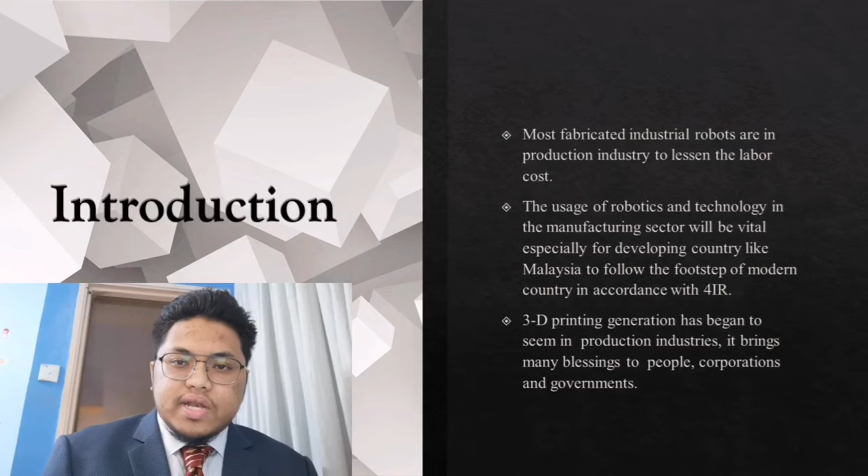For the summary of literature review, robots can handle things in ways that humans cannot, which involve hazardous, unsafe and repetitive tasks. There are many ways to fully utilize robots in industrial sectors such as material management, fabrication, welding and other repetitive tasks like stacking and discharging utilities.

The mechanical layout of the robotic arm is primarily based on a robotic manipulator with comparable features to a human arm. There are numerous potential directions for future studies where robot machining may be utilized in real world industries. The robotic arm can cover its own orbit as its operating space in the mechanical section.

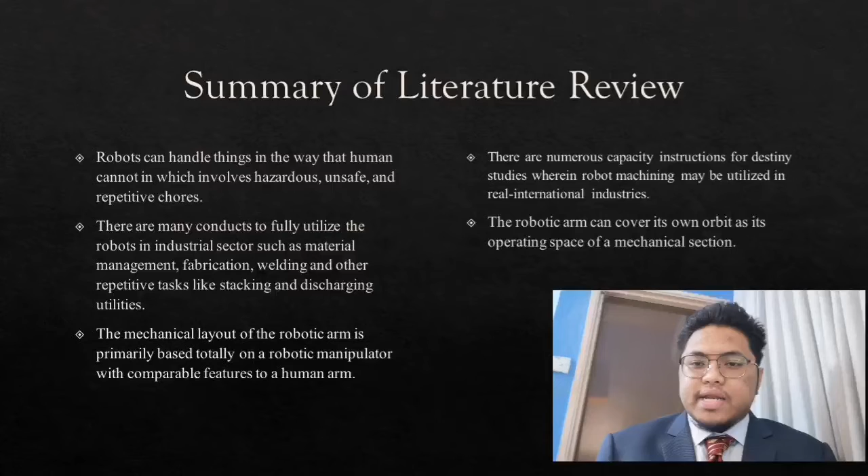Problem statement and objective: this project intends to break down the difficulties of the 3D robotic arm, constraint effects and outline mechanism. The striving and tricky aim was to locate a technique for development of mechanical structure design to attain the essential fundamental parameters. The prototype that exists in the lab has several shortcomings that must be overcome, which involve its design.

First and foremost, the shoulder of the robotic arm is too heavy and humongous, causing the overall motion to be halted. Due to its size, it cannot support the elbow to move smoothly, hence undermining its main objective, which is that its movement has to be effortless without any difficulties.

Servo motors are usually used in this project as actuators that pivot and rotate, also having thrust machinery sections with accuracy. Servos are primarily used for linear and angular motion with specific speed or acceleration. Back in the prototype, it mainly used servos as its actuators.

On the other hand, stepper motors are a better option compared to servos as they provide better power, attain a smooth and accurate flow, and at the same time sustain low product expenses. Multiple servos have been attached in the prototype, generating extra load and burden on the shoulder and elbow parts.

Also, 3D printing may be presented in parametric directives of freeform arcs. As a result, the essentially anisotropic properties of the 3D printed element may be controlled in such a way that it could be made tougher and more complex in either direction and particularly in regions with the right exploitation of the slicing software.

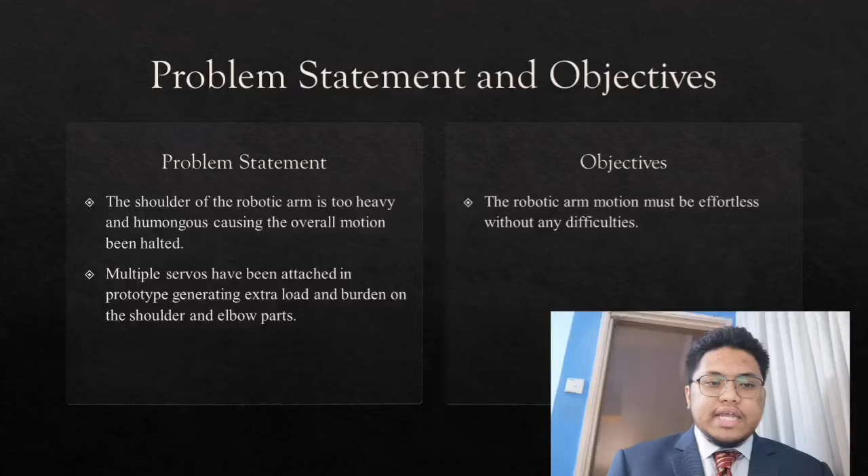It is not always the finest approach to enhance functionality and resolve manageability or other difficulties by combining more degrees of freedom through adding actuators, particularly during the initial layout phases at the start of the engineering project.

For the scope and limitations of the project, there are several limitations that halt the progress of this project because of several aspects of reasons, be it engineering-related problems or not. First and foremost, in order to be applied in the industrial sector, the robotic arm should be larger.

As we all know, to make a huge robotic arm comparable to existing metal robotic arms in industry, the 3D printer available in the faculty lab could make parts up to several centimeters. This project focuses on a smaller prototype with the same application and parameters, so that it could be emphasized by big manufacturing companies and accomplished without complication.

There are not many samples that will be tested, as the ink is expensive for high quality 3D ink material, needed for a stronger and more stable product outcome.

Throughout this semester, this project had been conducted in the Sports Engineering and Artificial Intelligence Center in the Mechanical Engineering Faculty. As ODL had been going throughout this semester, it is very difficult to have face-to-face meetings with the supervisor, as it's located far from home, so only a handful of meetings could be done at UiTM. The rest had to be done during online sessions to consult and receive the finest guidance through this entire project.

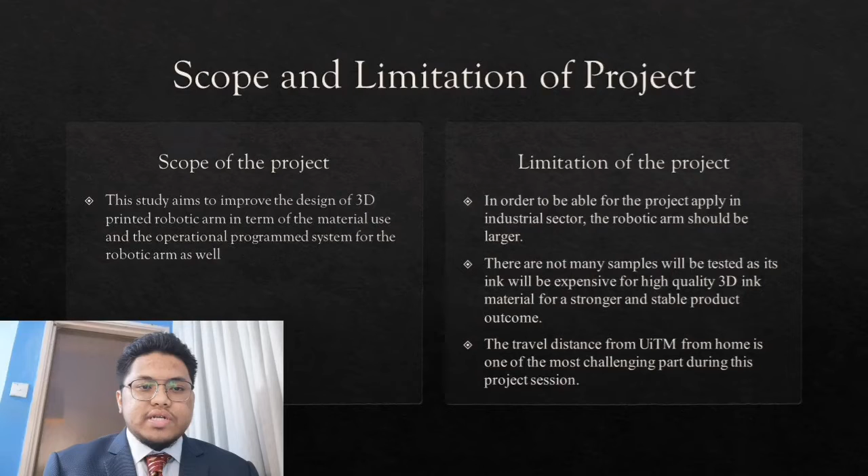For the scope of the project, this study aims to improve the design of the 3D printed robotic arm in terms of material use and the operational program system for the robotic arm as well.

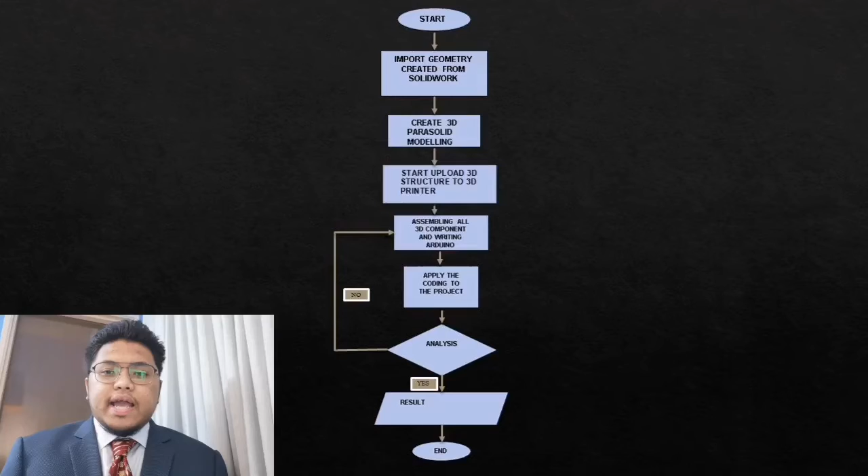For the methodology, this diagram shows the flow of the project from beginning until end. There are four main flows of this project: modeling, assembling, coding, and analysis.

For the modeling, the process started with modeling the 3D robotic arm structure using SolidWorks 2020 software. The pattern part was then saved as a file to transfer into the 3D printer. Before uploading the file, make sure to examine thoughtfully the measurement, dimension, and aspect according to the desirable element.

For assembling, the properties and parts for all the components are assembled, compiled, and applied. The established robot model comprises a major number of variables that influence joint location, considering not only physical variables such as weight, length, mass, friction, static stress, and forces. All of the mentioned have been utilized in concurrence with the factual parameters of the robotic arm.

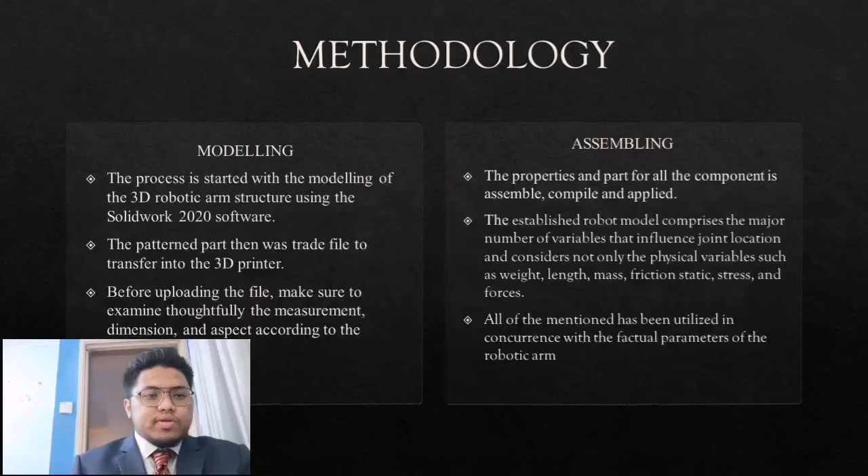For the coding and analysis stage, the process starts with writing the coding for Arduino using its software, then importing the program into the 3D model. Next, after applying the code into the model, we assess the robot motion for a simple task. Until the robotic model can fulfill all the simple tasks, the coding will be written repeatedly.

As for the analysis, the assessment and authentication of the robot arm is one of the most laborious tasks, as it requires repetition as many times as it takes. Various difficulties occur during analysis, such as incorrect angle estimation, poor motor adjustment, complications with substantial dimensions for angle and point, and one of the servos burned up due to unforeseen excess load.

Expected result: the improvement and development of the 3D robotic arm to achieve stable posture hand motion mimicking a human arm. The advancement of the program's algorithm will clarify the constraints needed to attain a steady hand swinging motion. The goal is to develop and employ improvements on the pre-existing prototype of the robotic arm.

This robotic arm can fulfill simple tasks such as grappling items, impersonating human hand and arm motion, to be applied in many industrial sectors, thus opening up new possible varieties in other sectors such as education and construction.

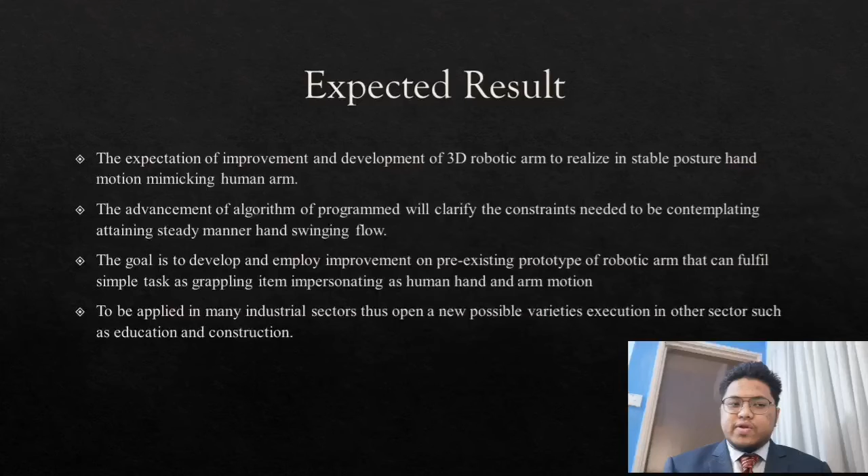For the project planning, several activities were done during FYP 1: choosing the supervisor during week 1, deciding the topic during week 2, submission and registration form during week 3, and searching and surveying academic literature papers throughout week 1 until week 11. Methodology and preliminary result preparation, and producing the proposal, were done during week 12 and week 13. Submission and presentation of FYP 1 was done in week 14.

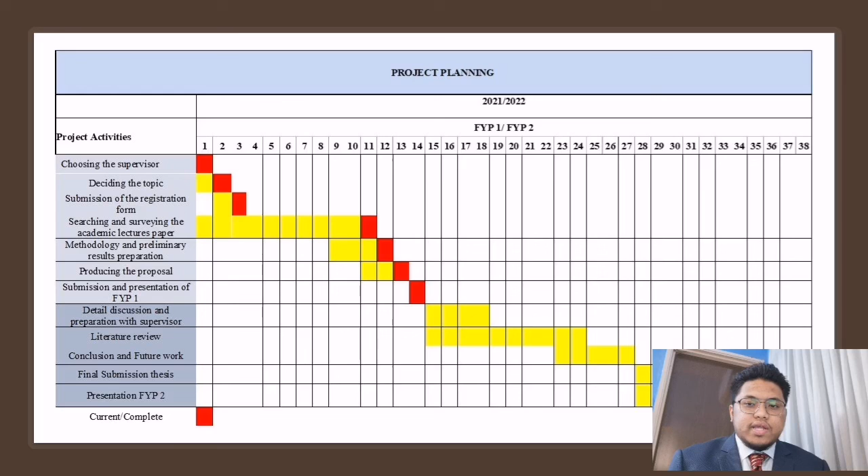For further activities in FYP 2 during the last semester: detailed discussion and preparation with the supervisor from week 15 until week 18. Literature review, conclusion, and future work will be done from week 15 until week 27. Final submission of thesis and presentation of FYP 2 will be done during the final week, which is week 28 of this project.